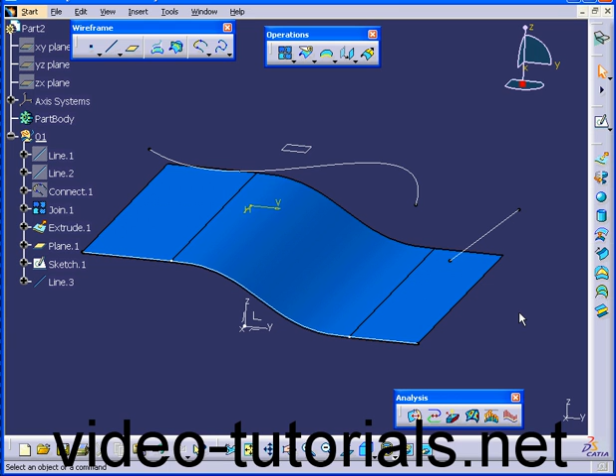Welcome to our tutorial on the projection command. Let's start by activating the projection command and exploring its definition dialog window. Under projection type, we've got two options, normal and along a direction.

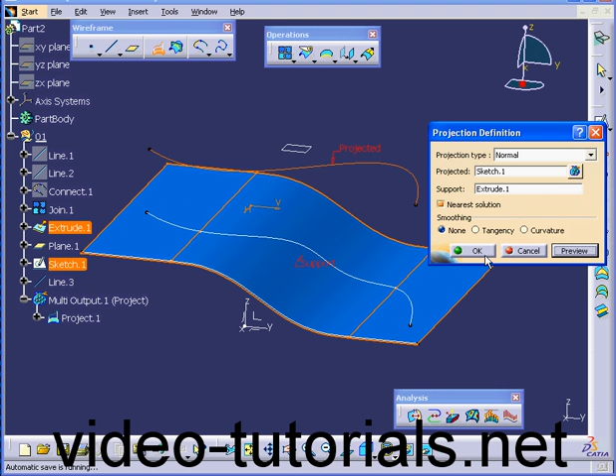Let's select normal. In the projected selection box, we're going to select this curve. Under support, let's select this surface. Click Preview and OK. Now let's run the Curve Connect checker.

Let's start from the original curve. As you see, we have no problems with either tangency or curvature. Basically, it's a single continuous line.

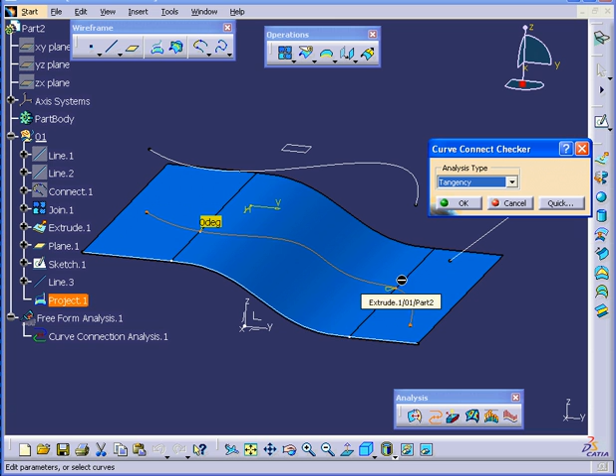But if I select the projected line we just created, we obviously have some problems here. The curvature discontinuity is 51% at this point. The tangency seems to be okay. Let's cancel out of the Curve Connect checker.

Let's double-click on Project.1. In the Smoothing Definition area, we've got three options: None, Tangency, and Curvature. Let's select Curvature. Deviation we'll leave at the 0.001 and click OK.

Let's run the analysis again. Curvature first. Select our curve. Both look good now. Tangency as well looks good. Let's see, perhaps we can enhance our spline even more.

Let's check the 3D smoothing option this time. This type of smoothing is calculated without specifying any particular surfaces. Let's click OK, and then run the Curve Connect checker analysis.

I'm going to select this line. As you see, we now have one continuous line. Let's cancel out of our Curve Connect checker analysis. The smoothing option doesn't always work. You actually need to have pretty smooth surfaces to begin with.

I'm going to run another analysis. I'll select this surface. You see here, the surface is actually quite smooth to begin with. Let's cancel out of this analysis for now. Let's make some changes. Double-click on Connect.1.

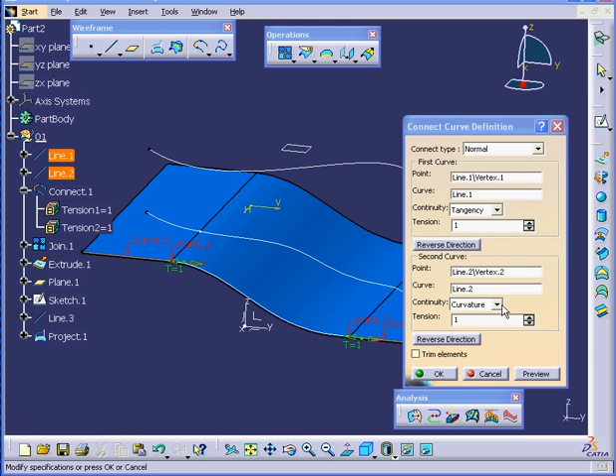You see that between this point and this point, we have curvature continuity. I'm going to change this to tangency and click OK. Now let's run the porcupine curvature analysis on this surface again. You can see that we don't have smooth transitions here or here.

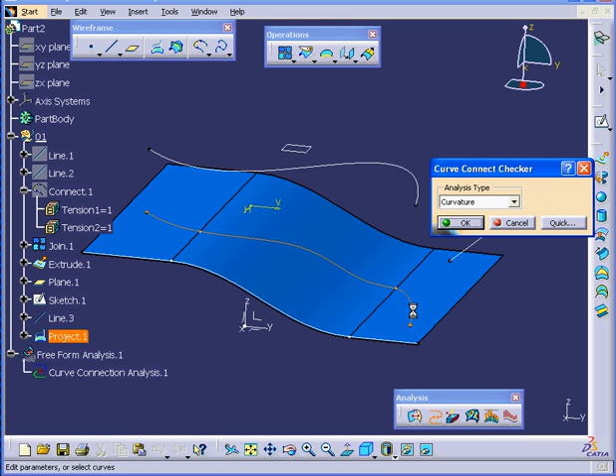Let's go check how our line is doing. Select the curve. Surely enough, we have some problems now with curvature continuity as well as with the tangency.

There's two points that I'm trying to illustrate here. Our example shows that continuity can be lost during the projection process. Let's cancel out of the Curve Connect checker for now.

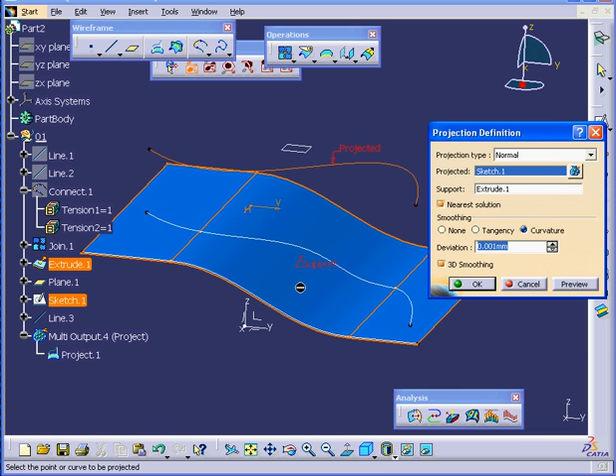When we implement the smoothing function, it doesn't always correct the problem. Basically, the underlying or support surface needs to be smooth to start with. Let's click OK. And this concludes our tutorial on the projection tool.